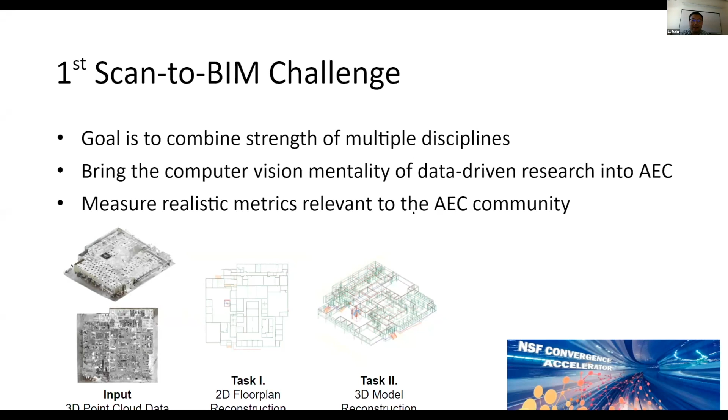Then there are also previous Scan2BIM data sets, mostly from the AEC community. One can see that previously there was Ochmann et al., which has 6 floors, from Denmark.

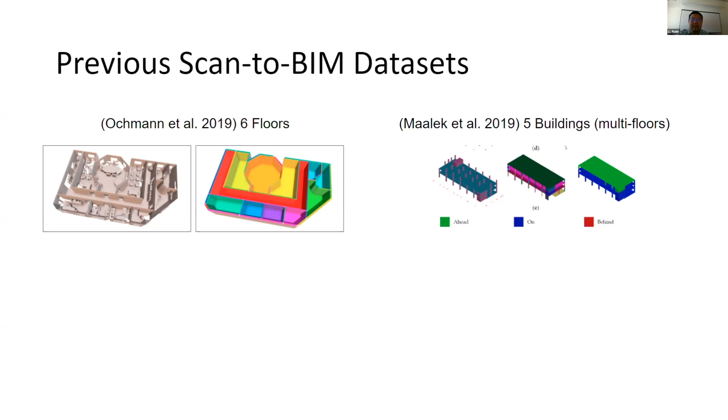And then Maalek et al., which has 5 buildings with multiple floors. Then another one, published in ICCV in 2019, has 100 floors and converts RGBD scans into vector graphics floor plans. But the main problem with this latter data set is that there are only a few rooms per building, and there are no structural components such as doors, and it was not evaluated topologically, and there's no wall thickness represented.

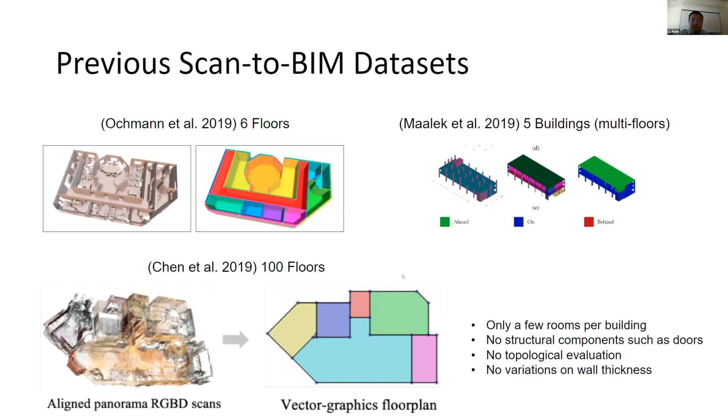So in our data set, we obtained this data from the state of Oregon, from 3 public buildings in the state of Oregon. It was scanned with the BLK 360 scanner. This data set includes a total of 91 floors of point clouds. We separated them into 2D tasks and 3D tasks.

In the 2D task, there was training, validation, and testing, and then 3D tasks as well. So in the 2D task, the training and validation point clouds and the corresponding 2D floor plans are released to the contestants. In the case of testing, only the point clouds were released, and then contestants submit their results on an evaluation server that we built.

As well as realistic noise. Different from simulation data, our scanner captures noise sometimes, for example outside the window. Even if you are scanning inside the window, if the window is open, you can capture some points that are outside of the window, which is also interesting as a realistic data set.

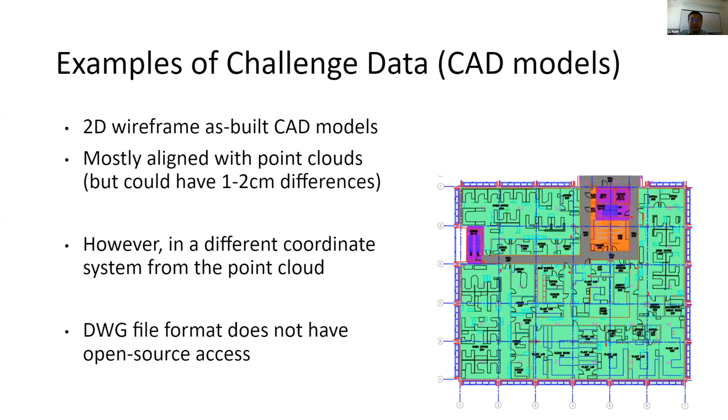Besides, the CAD models come in DWG file format, and it is difficult for open source software to directly access that data. So we had to do our own work to convert it to an open source format to make it available. I would like to credit the team that developed all the code and the models and the evaluation servers for the challenge.

This team is a very interdisciplinary team from Oregon State University, Stony Brook University, as well as a company, O-Vision. There's a total of 11 people that directly participated in the development of the challenge, and this is really joint work with a lot of people and quite a lot of work to get this data ready.

So let's look briefly at the data cleanup process. There's quite a few different issues from both the point cloud side and the CAD model side.

One can see that our point clouds are really big, they are kind of architectural standards. Our original point clouds for each building have like 267 different scans, and this is for one building, with about 681 million points in that building.

After the cleanup process, we combined it all together, put everything in the same coordinate system, and it becomes one file with 120 million points. One can note that the scale here is significantly higher than a lot of the point cloud data sets people have worked with before in computer vision.

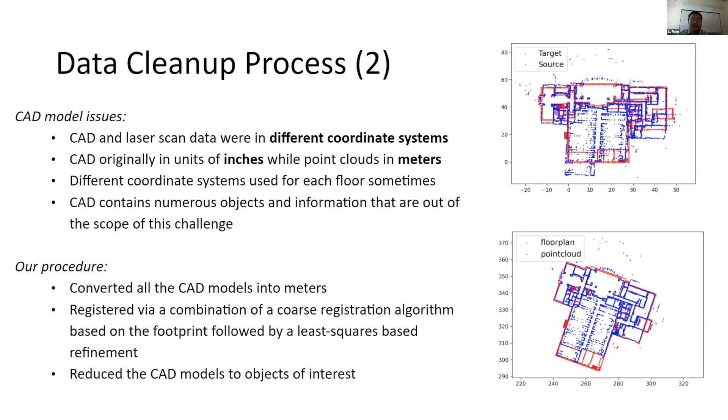In terms of the metrics, we would like to build metrics that are realistic and useful to the AEC community. There has been this process where people from 3 different areas are talking together each week, over a process of quite a few months, to develop the metrics, covering point metrics, area metrics, and topological metrics.

We have involved people from Stony Brook who are very familiar with medical imaging, where they evaluate a lot of topological metrics, in order to develop those quantitative topological metrics for the challenge.

Let's start with the point metrics. In terms of 2D evaluation, we have these point metrics that are just simple matching. Every contestant provides endpoints for the walls and doors, those building elements, and there are ground truth endpoints. Those are matched with the Hungarian algorithm, and only points that are close enough are considered a match. We choose 3 different radiuses: 2 centimeters, 5 centimeters, and 10 centimeters.

One thing worth noting is that in computer vision, we usually have loose matching criteria. For example, we like to say if we can match within 10 centimeters, that's already great. However, this is far short of the requirements in the AEC community, where they would like to match up to only a 1 centimeter difference, which we cannot do at this moment because our released data is downsampled to 1 centimeter. If you actually want that 1 centimeter level accuracy, you need to process even larger point clouds. This is one of the differences unveiled during the challenge development process between the communities: in the AEC community, people like to be very precise. As a computer vision person, I'm just starting to realize that is the case.

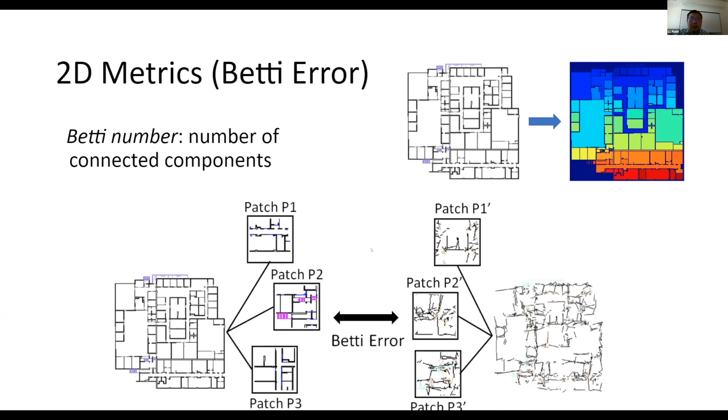And then finally, we present the challenge results. So in the 2D challenge, we have 5 participants from all over the world, from China, United States, Hong Kong, Germany, as well as Turkey.

So in this workshop, the top 2, the winner and the runner-up of the challenge, will be presenting their results and their approaches.

And then in the 3D challenge, because we spent a lot of time cleaning up the data, we didn't really get enough time to provide enough 3D ground truth models for automatic evaluation. Hence, we decided to employ a panel of organizers to manually check the 3D models. Each submission was reviewed by 4 different panel members on their accuracy, completeness, and correctness. A small bonus score was added for entries that provided solid models in IFC format.

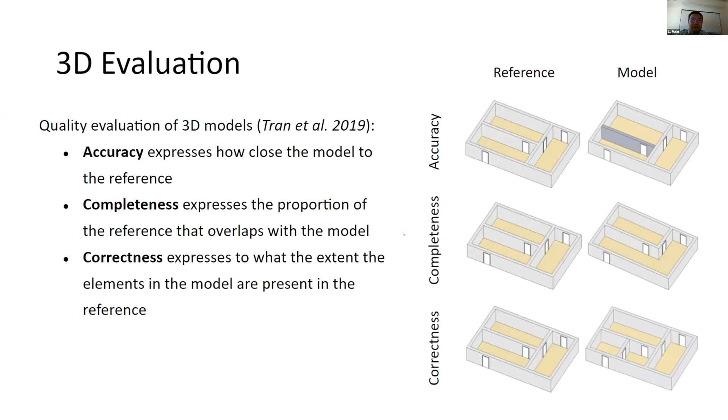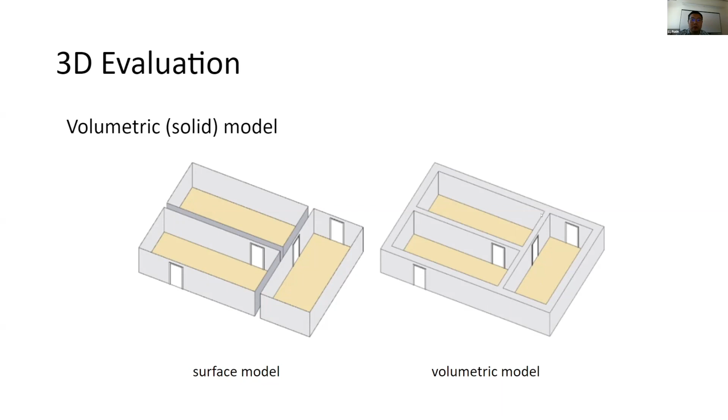And in terms of solid models, we gave bonuses for models that put walls as solid walls rather than as 2 different lines with nothing in the middle, since that's not the most correct 3D model. So we gave bonuses to those solid models, as well as if you export it into IFC format, which is a standard format and very important in the AEC community.

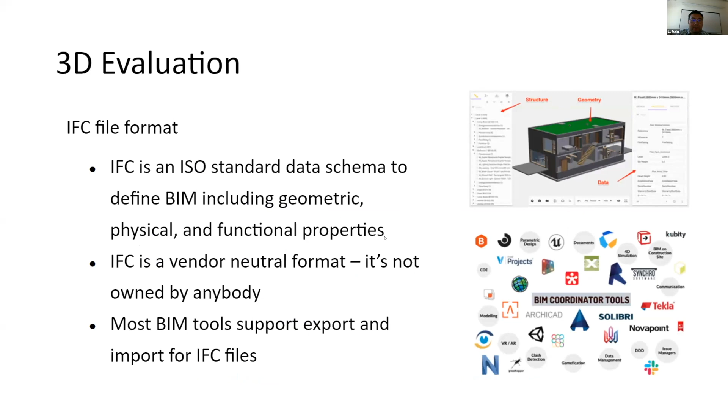So that's all I would like to introduce about the workshop and the challenge. Now I would like to give you an overview of the schedule for the rest of the workshop.

And then we'll have another keynote talk from Dr. Eleni Papadonikolaki, and then a 15 minute short break. Then 2 more presentations from the challenge, on 3D building model reconstruction, from TU Munich and then Purdue University. And then 2 more invited talks.